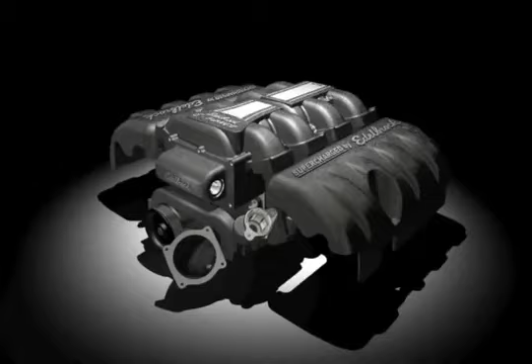Most aftermarket supercharger kits maintain the stock Ford throttle body, which is restrictive and requires the supercharger to work harder in order to achieve a given amount of airflow. The Edelbrock kit comes standard with a huge free-flowing 85mm electronic throttle body.

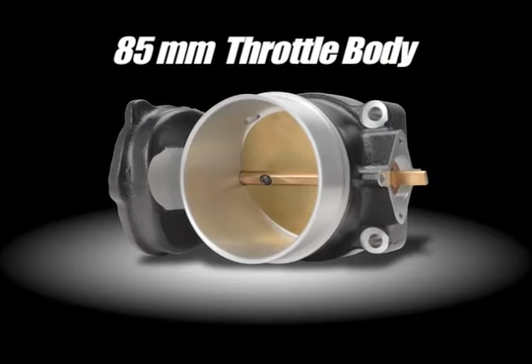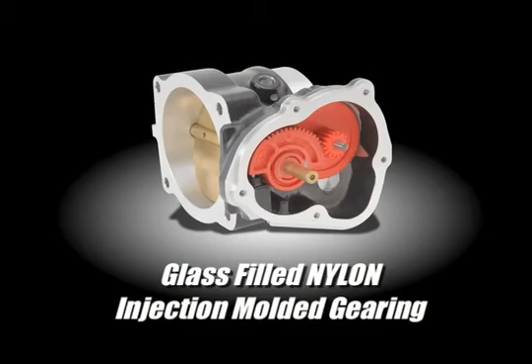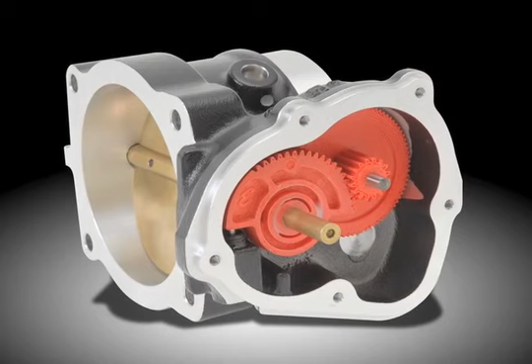In addition, our throttle body is built to OEM standards with a 356 T6 cast aluminum housing, brass throttle blade, and glass-filled nylon injection-molded gearing. Other aftermarket throttle bodies utilize machined gears, which are known to bind and cause dangerous stuck throttle conditions. Our injection-molded gears are made to the same material and dimensional specifications and tolerances as the factory Ford unit, ensuring safe, reliable operation.

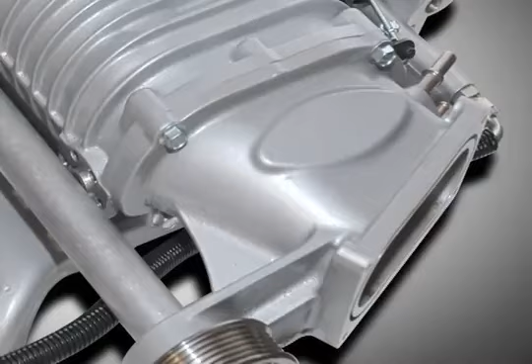Axial flow positive displacement superchargers have conventionally been arranged in one of two ways: front drive rear inlet or rear drive front inlet. Each has its drawbacks. With the rear inlet, the air has to be routed from the filter box, typically at the front of the car, all the way back to the rear of the supercharger. This long path with lots of bends is very restrictive. The supercharger is driven off the crank pulley at the front of the engine. Rear drive requires the use of a jack shaft and an auxiliary drive belt at the back of the supercharger. These systems are notorious for failures.

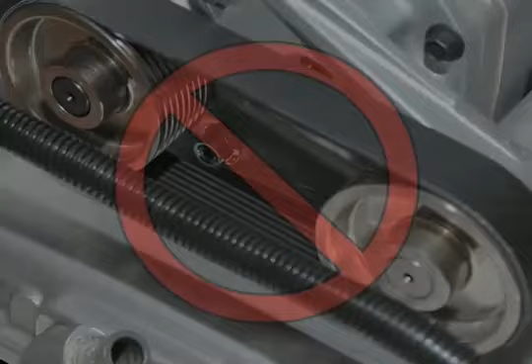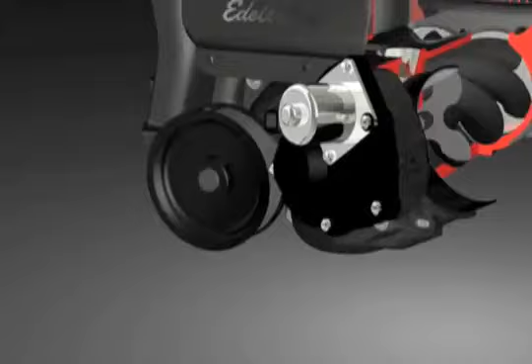On the Edelbrock supercharger, the rotors are installed from the rear of the housing, as in a rear drive front inlet setup. However, instead of using a jack shaft and driving the supercharger from the rear, a front drive setup is utilized and coupled to the end of the rotor shaft for a very simple, reliable, and elegant setup, which combines the short, straight inlet path of a front inlet configuration with the reliable and compact front drive method.

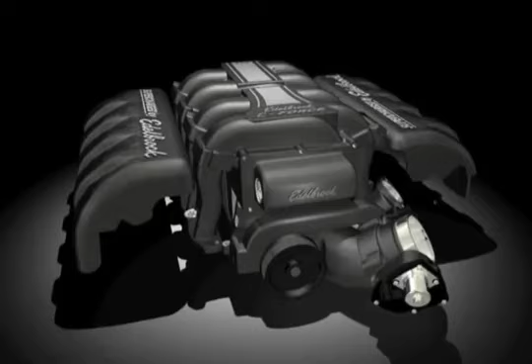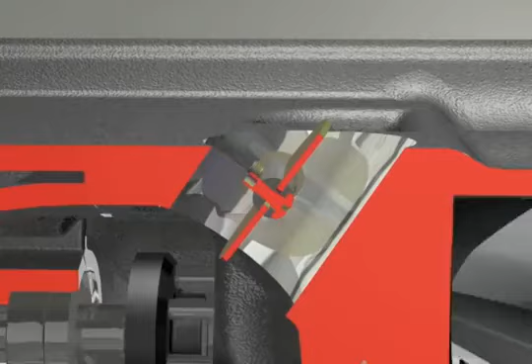The bypass valve is a vacuum-actuated throttle plate that divides the inlet and outlet plenums of the supercharger. Under normal driving conditions, when horsepower demand is low, the valve is held open by manifold vacuum. This equalizes the pressure before and after the supercharger rotors, minimizing any parasitic power loss associated with pumping air. That means that as long as the valve is open, the engine does not use any more fuel than it would if the supercharger were not installed, so your long commute to work will still use the same amount of gas as before.

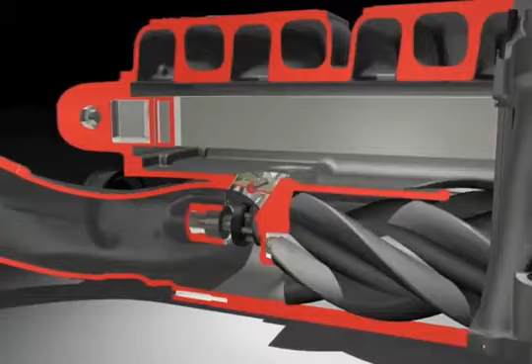When you step on the accelerator pedal and the throttle body opens, the manifold will lose vacuum and the bypass will close. This allows all intake air to pass through the supercharger rotors and for positive boost pressure to build up in the plenum. What makes the Edelbrock bypass unique is its integration into the supercharger housing. Many competitive kits use external bypass valves that utilize couplers or gaskets that can leak, leading to dangerous lean running conditions down the road.

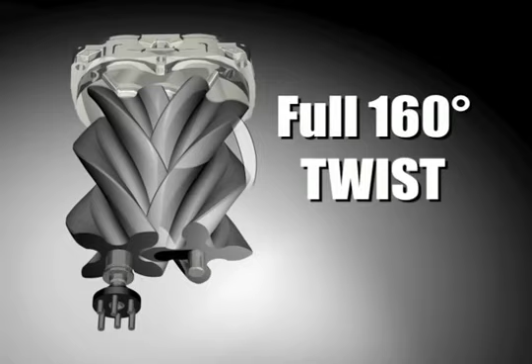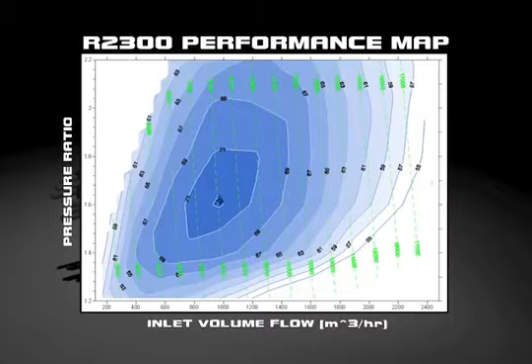At the heart of the new Edelbrock E4 supercharger are the new Eaton TVS rotors. They represent the cutting edge of technology in the world of supercharger design. They feature a 4-lobe configuration and a full 160 degrees of twist. This improves both volumetric and thermal efficiency, meaning that with each revolution, the maximum airflow is achieved with the minimum of effort from the engine, and with minimum temperature rise in the charge. That translates to more horsepower to the ground more consistently. These new rotors also operate much quieter than any other rotors on the market, so there is no annoying whine, gear rattle, or other undesirable NVH.

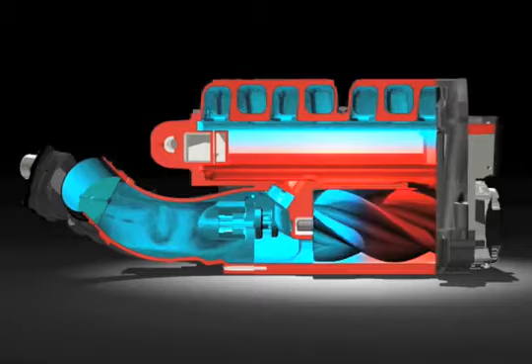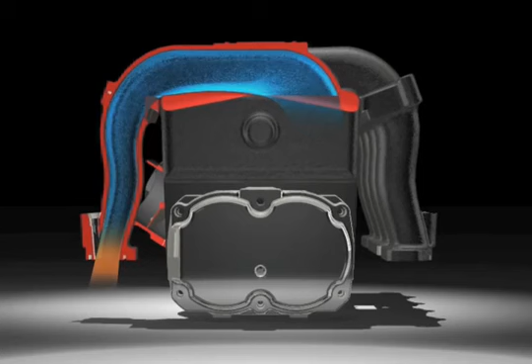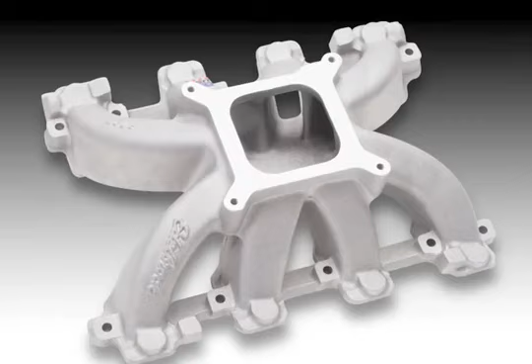Once air exits the supercharger rotors and is pressurized in the plenum, it passes through the enormous 110 square inch intercooler. Cool water flowing through the intercooler core absorbs heat from the pressurized air. This increases the density of the air and reduces the volatility of the fuel air charge entering the combustion chamber. That means that there is more oxygen available to burn fuel, and the spark can be further advanced, both resulting in increased horsepower.

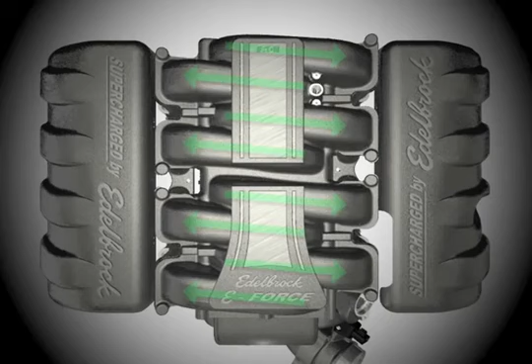Just like in a normally aspirated intake manifold, longer runners maximize low-end torque. Packaging the supercharger down low in the valley of the engine and orienting the outlet of the supercharger upward allows for a long, smooth intake runner path with minimal bends. Edelbrock went one step further and designed an interlaced cross-runner pattern, resulting in a full 15 inches of runner length with no sharp bends. Conventional supercharger systems mount the supercharger on top of the manifold and blow the air down towards the bottom of the engine valley.

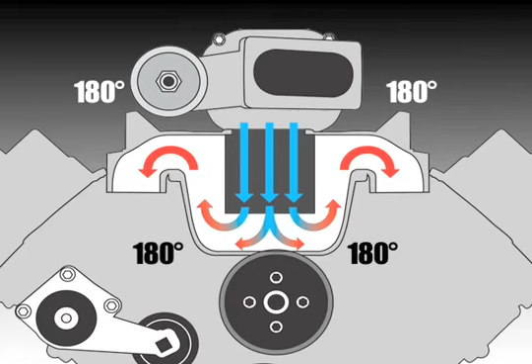The air then has to make a tight 180-degree turn back upward, and then yet another 180-degree turn back downward into the vertical intake ports of the 3-valve cylinder head. That conventional orientation also leaves little width for the intercooler down in the valley.

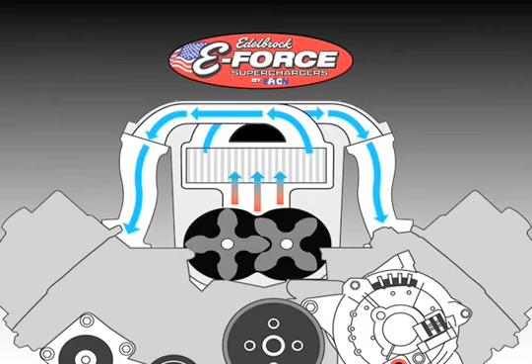Edelbrock's unique inverted design results in more low-end torque and considerably less restriction, allowing much more airflow at far lower boost pressures. In fact, the Edelbrock supercharger system requires as little as half the amount of boost that competitive kits generate to make the same power.

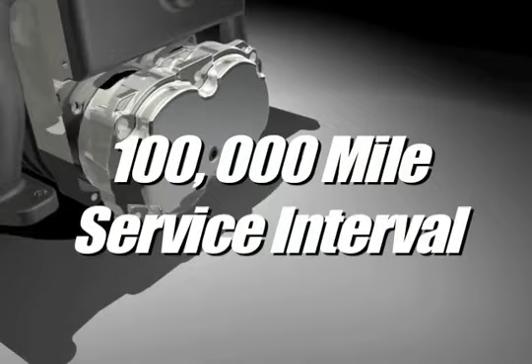When installing the Edelbrock supercharger, there is no oil plumbing to worry about. No drilling and tapping of oil pans like with centrifugal supercharger kits, which can leak and result in engine failure. Also, the 100,000-mile service interval means that you won't have to worry about changing the supercharger oil for a long time.

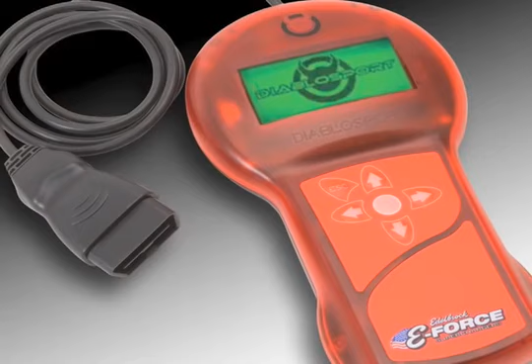The Edelbrock supercharger kit comes complete with a fully mapped calibration, delivered in a handheld programmer. The programmer allows you to download the tune directly to your vehicle's PCM through the OBD diagnostic port under your dashboard. Unlike other systems, the programmer is ready to go in the box. There is no sending away for the tuning module and no need to ship your PCM out for programming. You can install the kit and have it running the same day you receive it.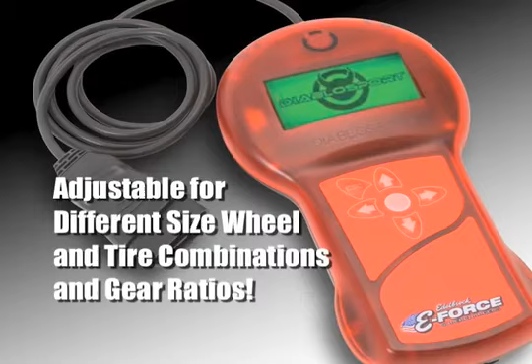The programmer also offers customization options to correct your speedometer for different wheel and tire sizes or gear ratios. The calibration itself has been painstakingly developed specifically for your vehicle in Edelbrock's in-house engine dyno laboratory, on our in-house chassis dyno, and on the road. It has been tested in all atmospheric conditions, including hot weather, cold weather, and high altitude.

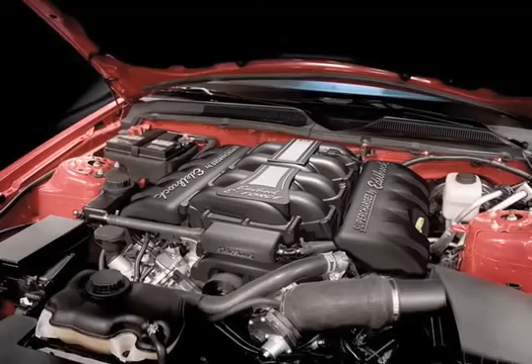This is not a weekend job that you'd receive at a local tuning shop on a chassis dyno only in a single atmospheric condition. This is a complete OEM level calibration that meets 50 state emission standards and maintains all factory electronic throttle safety features.

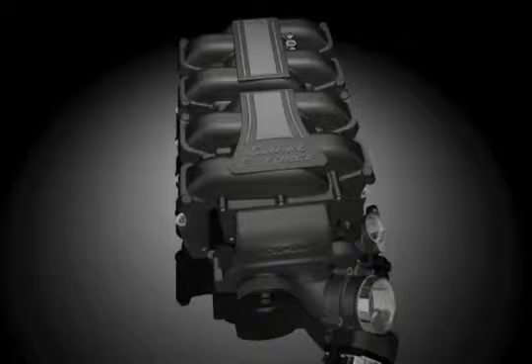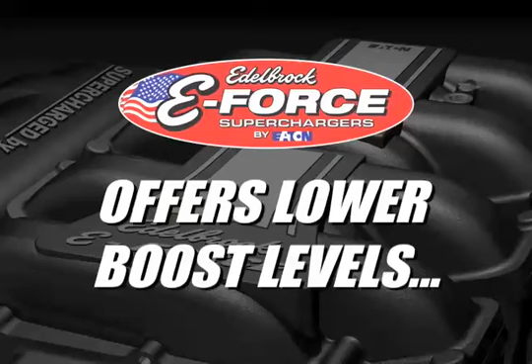This system is a direct bolt-on addition to your stock engine. There are no modifications required to your bottom end or cylinder heads. Be wary of competitors that require cutting of your cylinder heads, alternator, and oil pan. In addition, the low boost levels generated by the Edelbrock Supercharger allow you to enjoy the same horsepower without requiring bottom end upgrades necessitated by higher boost pressures. The entire system can be installed with basic hand tools in approximately 10 hours.

The Edelbrock Supercharger features a uniquely detailed manifold that looks great under the hood. A great looking manifold alone, however, does not make your engine compartment show ready. The stock Ford engine compartment is littered with hoses and wires. The Edelbrock kit comes complete with matching side covers that complement the Supercharger manifold and complete a seamless, show-ready look under the hood.

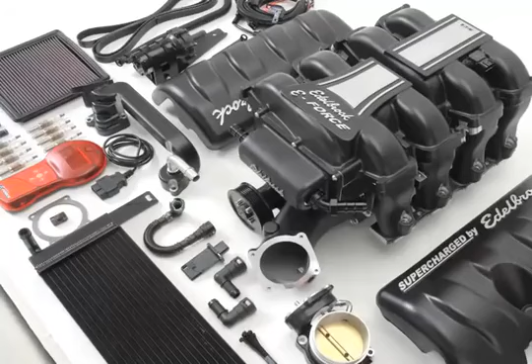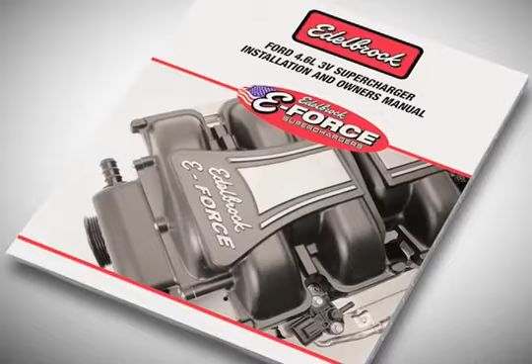True to the Edelbrock name, this Supercharger kit contains everything you need to install it on your vehicle. Every piece of hardware, every hose, every wiring harness, even special tools are included in the box. That means no trips to the hardware store, no need for custom tuning, just follow the detailed instruction manual and bolt it on. In addition to the necessities, this kit comes complete with additional components that our competitors consider upgrades and either charge you extra for or send you shopping somewhere else.

For instance, included in the kit is our exclusive 85mm throttle body described earlier. It's not a necessity, but we threw it in. Others charge as much as $600 for their upgraded throttle body. Other included upgrades are high flow fuel injectors, colder heat range spark plugs, matching side covers, upgraded mass airflow sensor, and more.

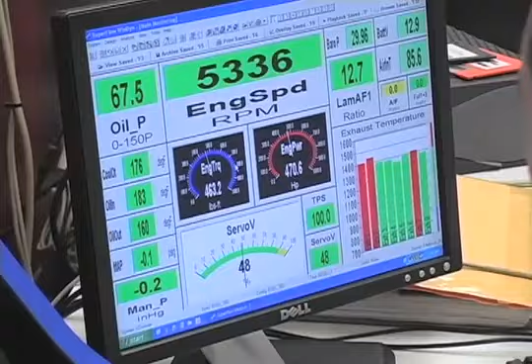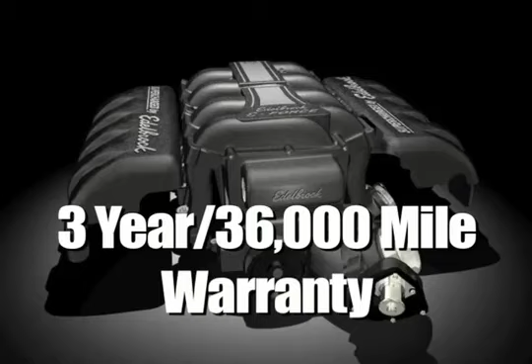Last but not least, included in the Edelbrock Supercharger kit is peace of mind. Not only because of the intense testing and no compromises attitude toward quality that has made this system bulletproof, not only because of the Eaton TVS rotors that have been designed and tested to the rigorous standards of OEM customers such as the Corvette ZR1 design team, but also because the Edelbrock name is standing behind this product, guaranteeing it with an available 3-year, 36,000-mile warranty that ensures zero risk when installing the system on your brand new vehicle.

In addition, this system is designed to comply with emission standards in all 50 states for all model years, including those that are equipped with the factory carbon trap. In fact, the Edelbrock Supercharger system requires as little as half the amount of boost that competitive kits generate to make the same power.